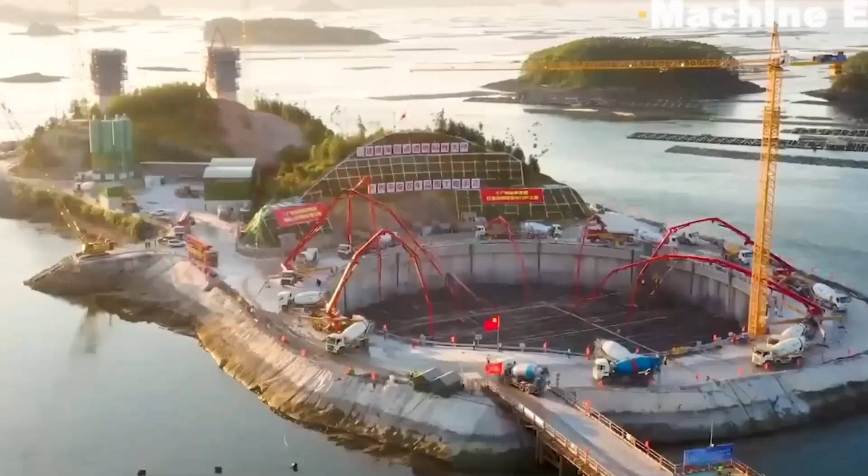A bridge in China could send your heart racing because it's the world's highest, and it opened today. It stands more than 1,800 feet above the valley below. Well, it's almost too good to be true. But it's true that China holds records for the world's longest, most massive, and greatest bridges of all time.

This powerful nation is not just building bridges, it is moving people, goods, and culture to different areas. As a global leader, no wonder engineers in America are left in shock due to the mighty Chinese construction technology. Let's start crossing some of these bridges and learn their monumental building journey.

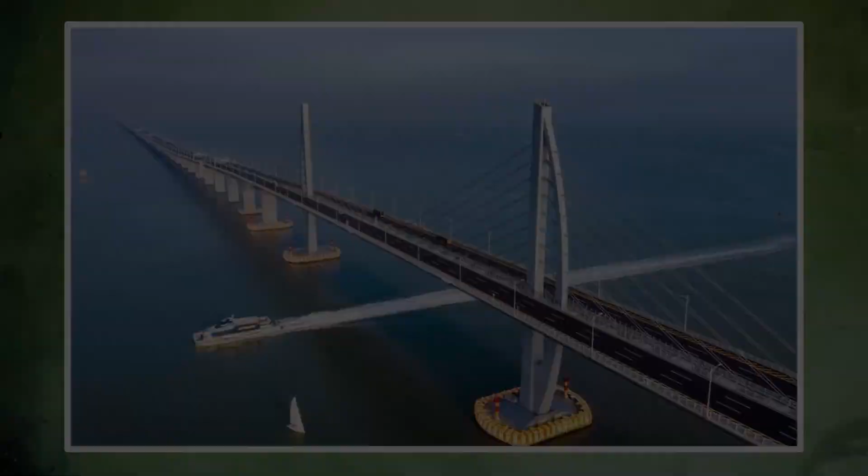We'll begin with the best bridge out there, truly stretched out and massive. The Danyang-Kunshan Grand Bridge, a colossal feat of engineering, is widely recognized as one of the most remarkable structures ever built. Spanning 164.8 kilometers, this bridge holds the title of the longest bridge in the world. Completed in 2010 and opened in 2011, it is a central component of the Beijing-Shanghai high-speed railway, one of the most important transportation networks in China.

The bridge's design, scale, and impact on both society and the environment make it a true testament to human ingenuity and modern engineering. The sheer size of the Danyang-Kunshan Grand Bridge is its most obvious and awe-inspiring feature. Stretching over vast expanses of water, wetlands, and mountainous terrain, the bridge is an unparalleled structure in terms of length. It surpasses any other bridge globally, earning its place in the record books.

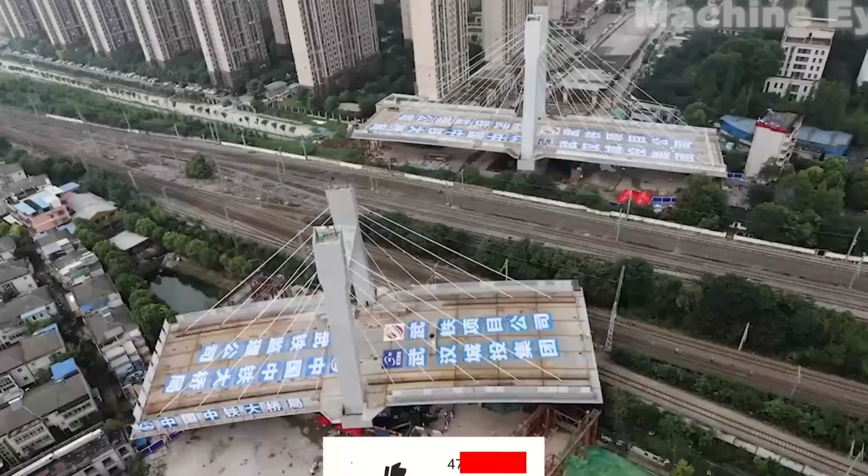The construction of the bridge required meticulous planning, precision, and coordination, with thousands of workers and engineers working tirelessly for several years to complete it. The scale of the project posed significant challenges, but its completion stands as a testament to the capabilities of modern civil engineering. What makes the Danyang-Kunshan Grand Bridge particularly impressive is not just its size, but also the advanced engineering and design that went into its construction.

Built to withstand extreme weather conditions, including earthquakes, floods, and strong winds, the bridge incorporates cutting-edge technology and innovative techniques. Its foundation was specially designed to adapt to the varying conditions of the terrain it crosses. The bridge spans large bodies of water, areas of soft ground, and even mountainous regions, making its design and construction especially challenging. The use of prefabricated sections, advanced cranes, and high-tech materials helped make the project possible, ensuring both durability and efficiency.

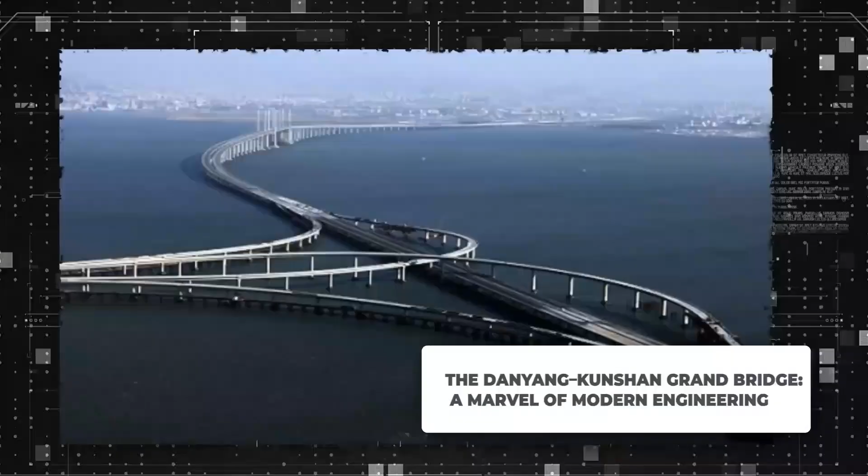The bridge is composed of several segments, each carefully constructed to meet the specific challenges of the environment. It is supported by a combination of viaducts, embankments, and elevated sections that allow it to traverse such a wide and varied landscape. The structure's design incorporates features that ensure the safety and longevity of the bridge, including anti-corrosion materials and reinforced supports that can endure the test of time.

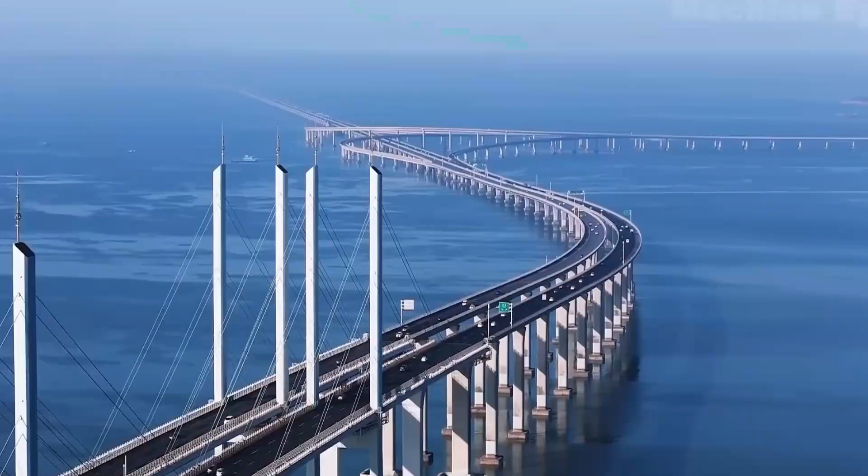Beyond its impressive engineering feats, the Danyang-Kunshan Grand Bridge plays a crucial role in China's high-speed rail network, which connects the bustling cities of Beijing and Shanghai. This bridge is part of the larger Beijing-Shanghai high-speed railway, which significantly reduces the travel time between these two major cities. The journey that once took over 12 hours by car or train is now reduced to about 4 hours, revolutionizing transportation in China and connecting millions of people to opportunities and resources across the country.

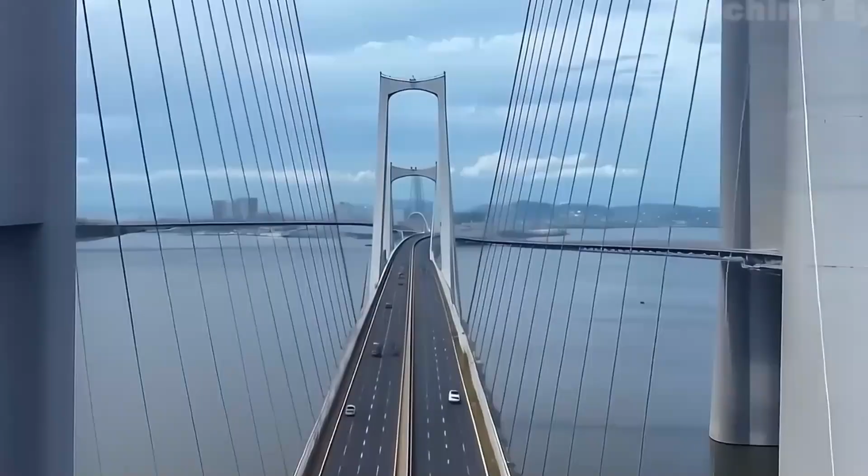This bridge, along with the broader railway system, has been a key factor in China's economic growth. By improving transportation efficiency, it has enabled faster movement of goods, tourists, and workers between cities, promoting economic integration and regional development. The Danyang-Kunshan Grand Bridge has thus become a critical artery in China's transportation network, facilitating trade, tourism, and communication between key urban centers.

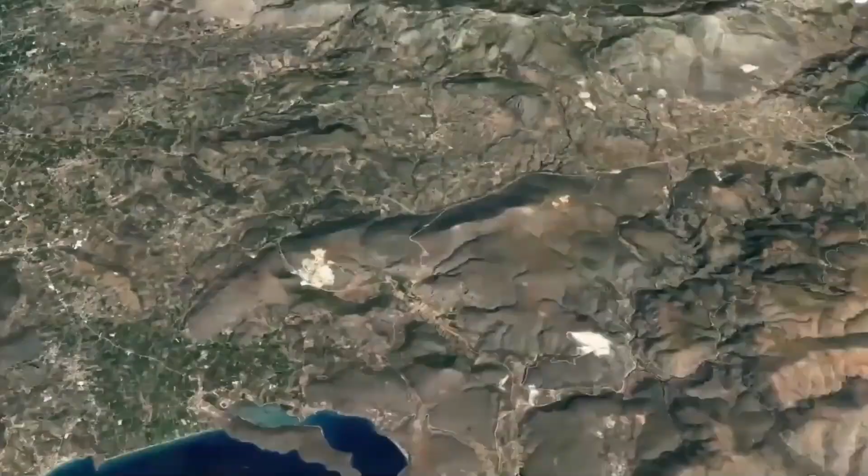The Danyang-Kunshan Grand Bridge was built with an awareness of its environmental impact. Construction techniques were chosen to minimize disruption to local ecosystems, and careful planning was undertaken to preserve the surrounding environment. Despite its massive scale, the bridge's environmental footprint was minimized, and its construction involved the use of eco-friendly materials and methods. In areas where the bridge crossed wetlands and rivers, engineers took special care to ensure that the bridge's foundations did not damage the natural habitats.

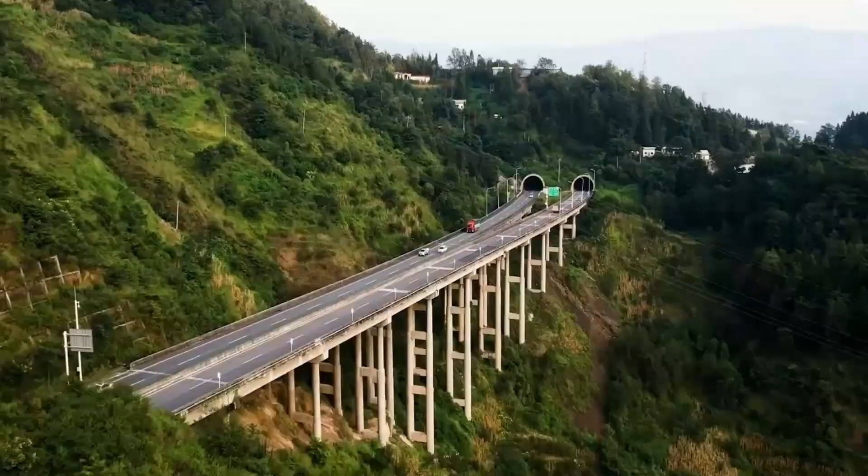Socially, the bridge has had a positive impact on local communities. It has brought new opportunities for trade, tourism, and business to regions that were previously less connected. The high-speed rail system has also made it easier for people to travel for work or leisure, improving the overall quality of life for millions.

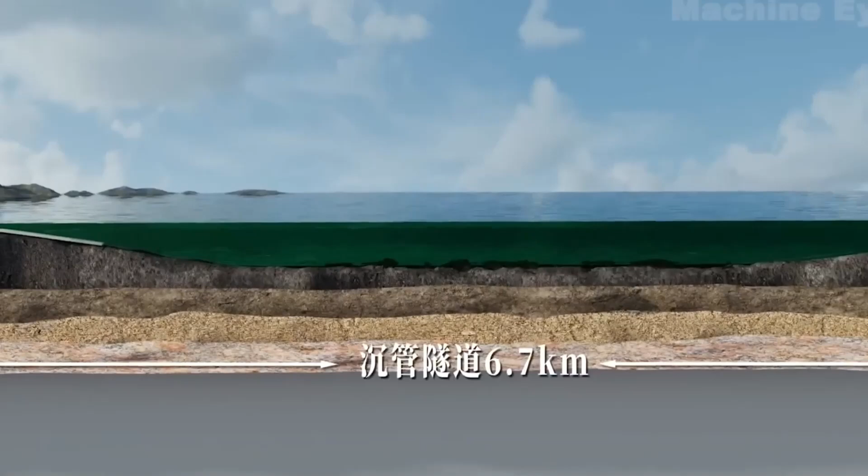The bridge, while a technological marvel, has also played a role in improving the daily lives of those who rely on its transportation system. The Danyang-Kunshan Bridge is a shining example of what can be achieved when engineering, innovation, and determination come together. Its construction not only reflects China's ambitious infrastructure goals, but also highlights the role of technology in overcoming complex challenges. The bridge's ability to cross diverse terrains, its innovative design, and its contribution to improving transportation make it a symbol of the progress that modern engineering has achieved.

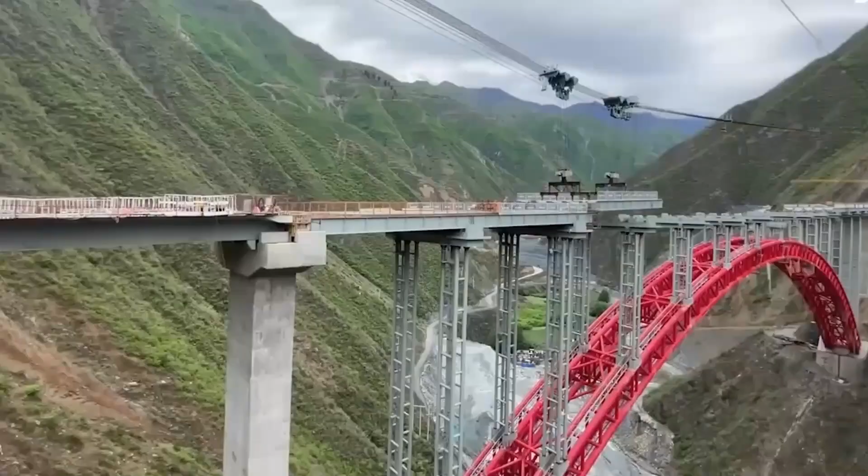The bridge's impact extends beyond its role as a transportation link. It is a symbol of China's ability to create world-class infrastructure and its commitment to enhancing connectivity across the country. It also serves as a reminder of the potential for human ingenuity to shape the future and address the growing demands of an increasingly interconnected world.

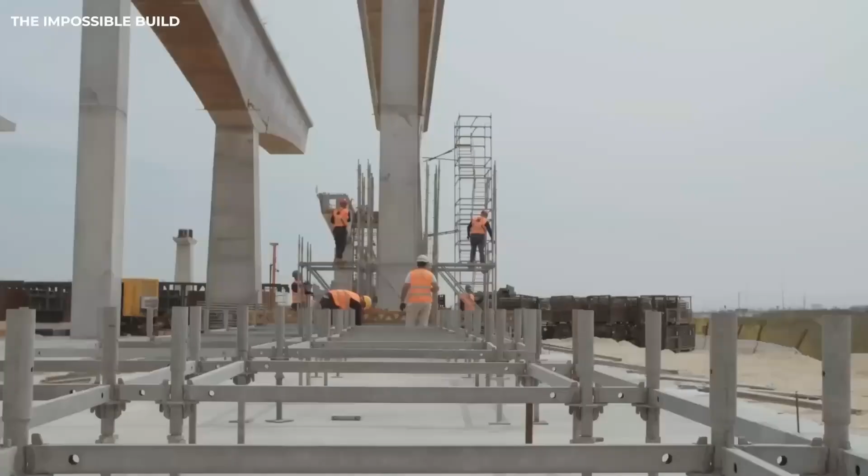As a key part of the Beijing-Shanghai high-speed railway, this unmatched bridge has revolutionized travel and played a significant role in China's economic development. The Danyang-Kunshan Bridge is not just a physical structure. It is a testament to the future of global infrastructure and the incredible feats that engineering can achieve.

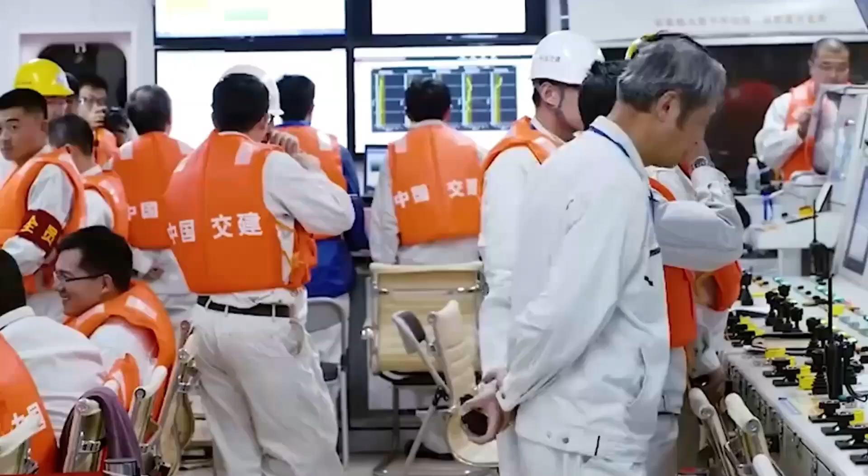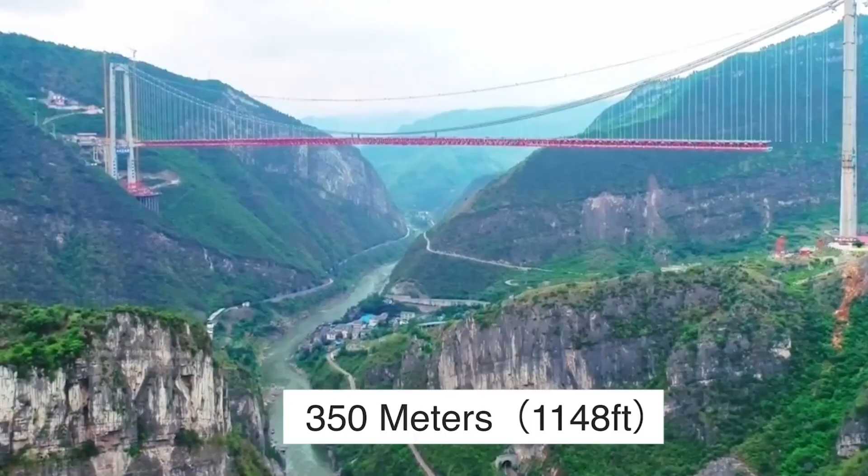The Hong Kong-Zhuhai-Macau Bridge is one of the most ambitious and awe-inspiring infrastructure projects in recent history. Stretching over 55 kilometers, 34 miles, this bridge and tunnel system links three major cities in the Pearl River Delta, Hong Kong, Zhuhai, and Macau, making it the world's longest sea-crossing bridge tunnel system. Opened in 2018, the HZMB has revolutionized transportation in the region, significantly reducing travel time between these cities and creating new opportunities for economic integration, trade, and tourism.

The bridge stands as a symbol of China's engineering prowess, economic development, and its vision for a more connected future. One of the most remarkable aspects of the Hong Kong-Zhuhai-Macau Bridge is its engineering complexity. The project combines a series of bridges, tunnels, and artificial islands to create a seamless connection between the three cities.

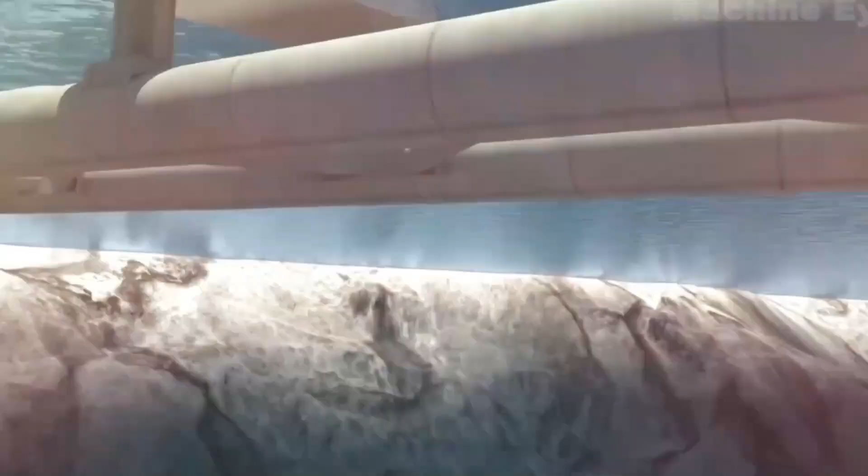The structure includes a 22.9-kilometer bridge, a 6.7-kilometer tunnel under the sea, and a 1.3-kilometer artificial island. The tunnel portion was designed to allow ships to pass through the busy waters of the Pearl River Delta without obstruction, which required innovative engineering solutions to ensure safety and efficiency.

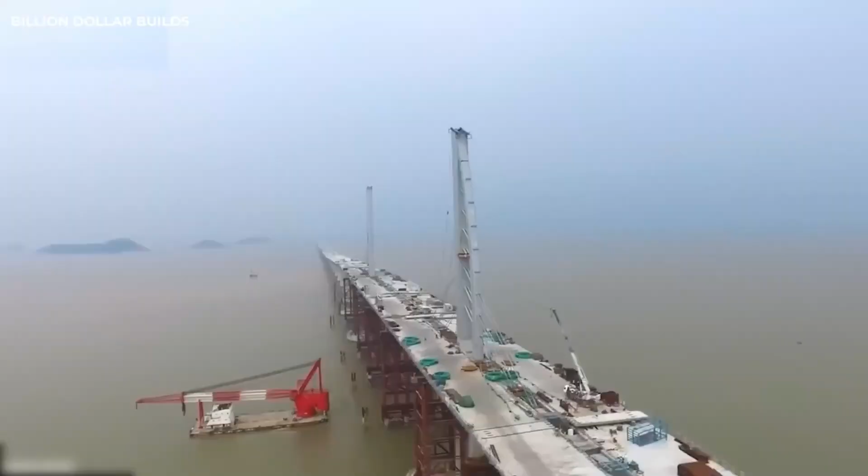The bridge was constructed to withstand the harsh conditions of the region, including strong winds, typhoons, and seismic activity. The use of advanced technology, such as high-strength concrete and steel, as well as state-of-the-art construction techniques, was essential to creating a bridge capable of enduring these environmental challenges. The project also involved overcoming significant logistical and technical hurdles, such as building a tunnel in the sea and creating artificial islands to support the bridge.

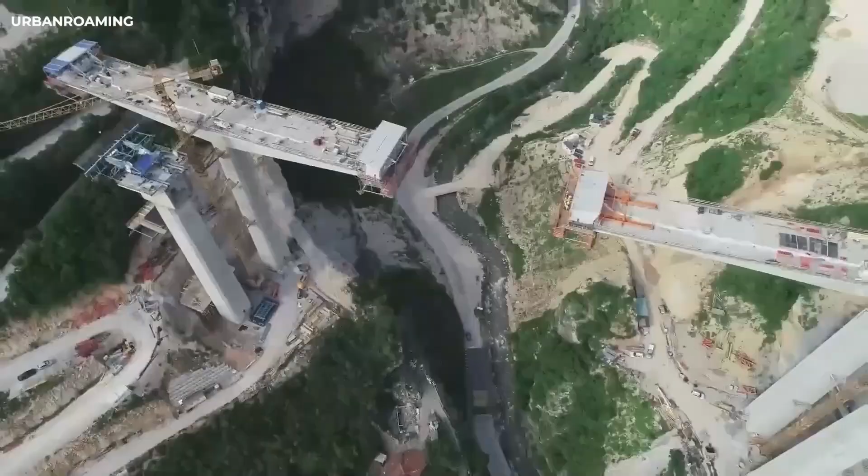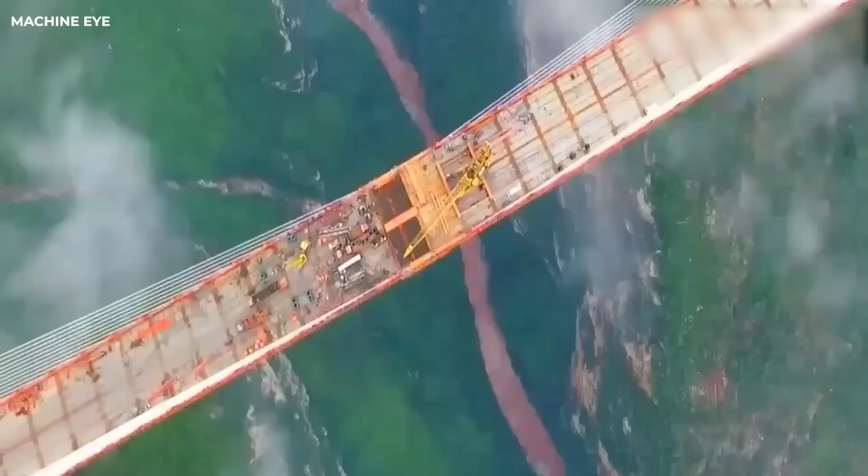Before the Hong Kong-Zhuhai-Macau Bridge, traveling between Hong Kong, Zhuhai, and Macau was time-consuming and inefficient. The journey by road or ferry could take up to 4 hours, depending on traffic and weather conditions. With the opening of the HZMB, travel time between Hong Kong and Zhuhai has been reduced to just 30 minutes, while the journey between Hong Kong and Macau now takes only 45 minutes. This dramatic reduction in travel time has transformed the region's transportation landscape, making it easier for people to travel for work, leisure, and business.

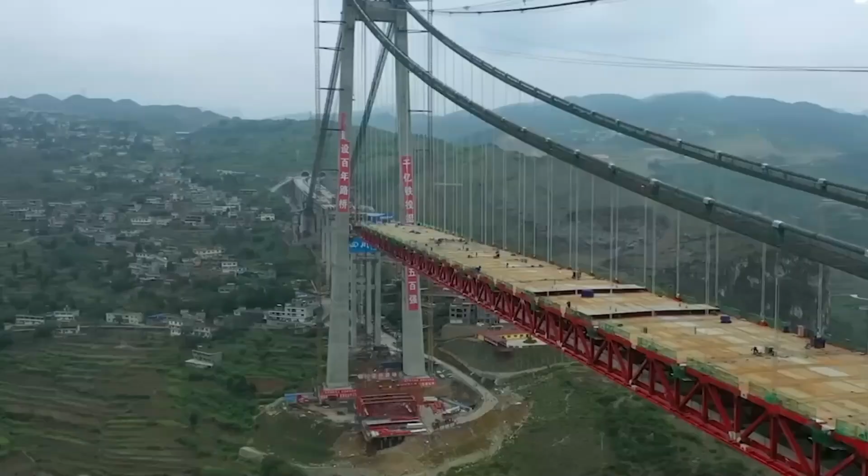The bridge also enhances the economic integration of the Greater Bay Area, GBA, a region that includes Hong Kong, Macau, and 9 cities in Guangdong Province, including Zhuhai. This area is one of China's most dynamic economic regions, and the HZMB plays a crucial role in connecting its cities and facilitating the movement of people, goods, and services. The bridge has opened up new possibilities for cross-border cooperation and trade, allowing businesses to operate more efficiently and individuals to access new opportunities in neighboring cities.

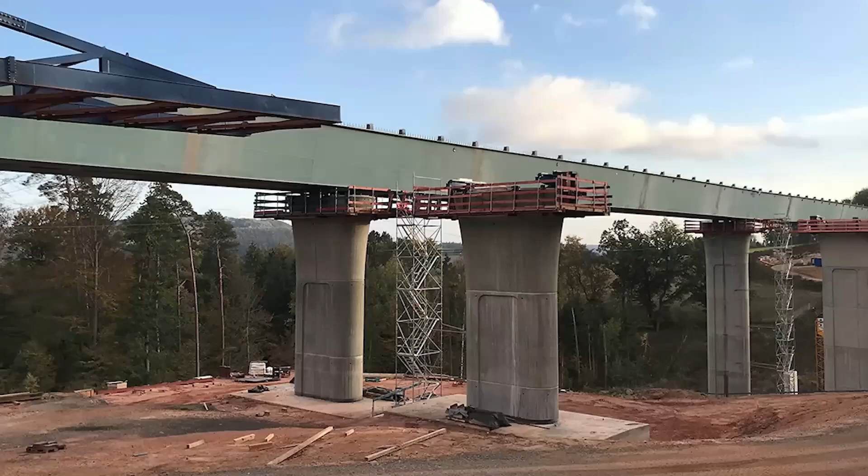The Hong Kong-Zhuhai-Macau Bridge has had a significant impact on tourism in the region. Prior to the bridge's construction, travel between Hong Kong, Macau, and Zhuhai was often cumbersome and limited by ferry schedules or border control procedures. With the bridge in place, tourism has become more accessible and convenient, benefiting both local economies and international visitors. The bridge makes it easier for tourists to visit multiple cities in a single trip, boosting the tourism industry in all 3 regions.

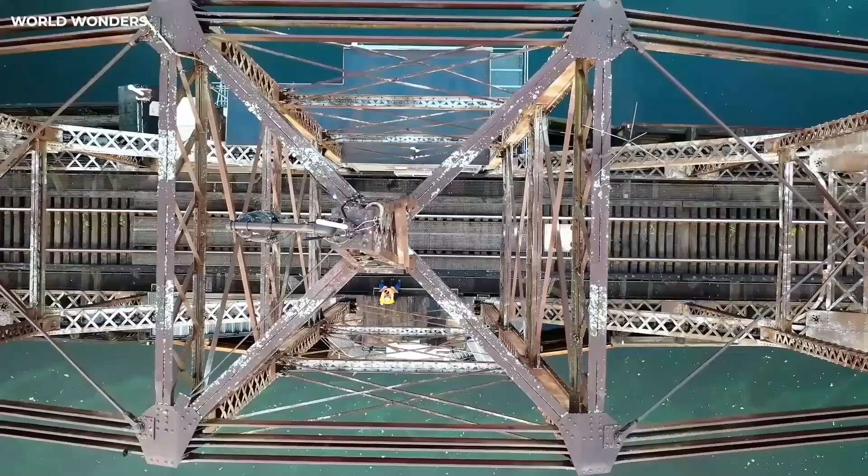Moreover, the improved connectivity has contributed to regional development, particularly in Zhuhai and Macau. As more people are able to travel easily between these cities and Hong Kong, new business opportunities have emerged, leading to economic growth and the creation of jobs.

The HZMB has also helped to stimulate investment in infrastructure and services, further boosting the region's development prospects.

While the Hong Kong-Zhuhai-Macau Bridge is a monumental achievement in terms of engineering and transportation, it has not been without its environmental and social challenges.

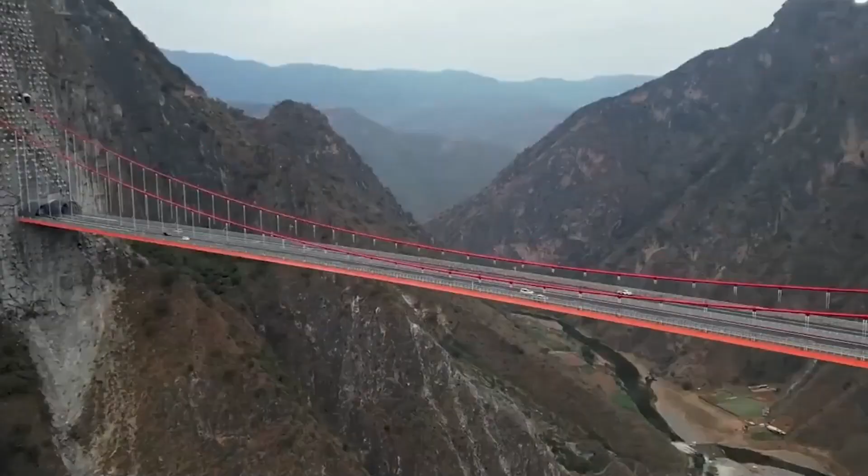The construction of the bridge involved significant changes to the region's landscape, including the creation of artificial islands and the alteration of marine habitats. Environmental impact assessments were conducted to mitigate these effects, and various measures were implemented to reduce the bridge's ecological footprint, such as ensuring the preservation of marine life and minimizing the impact on air and water quality.

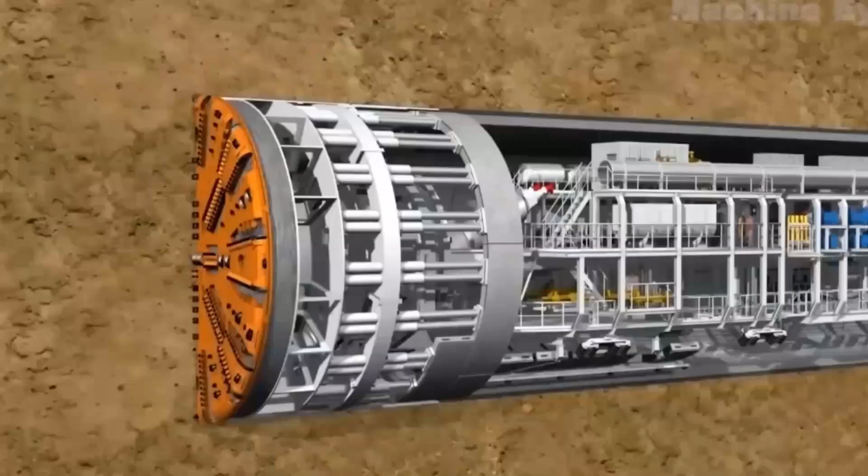Socially, the bridge has faced some criticism due to concerns about its cost, which amounted to approximately $20 billion, and its potential impact on the communities in the area. While the bridge has undoubtedly created new opportunities for economic growth, it has also raised questions about its long-term benefits and the extent to which it will improve the quality of life for local residents.

However, supporters argue that the bridge will eventually have a transformative effect on the region's economy, providing lasting benefits for businesses and individuals alike.

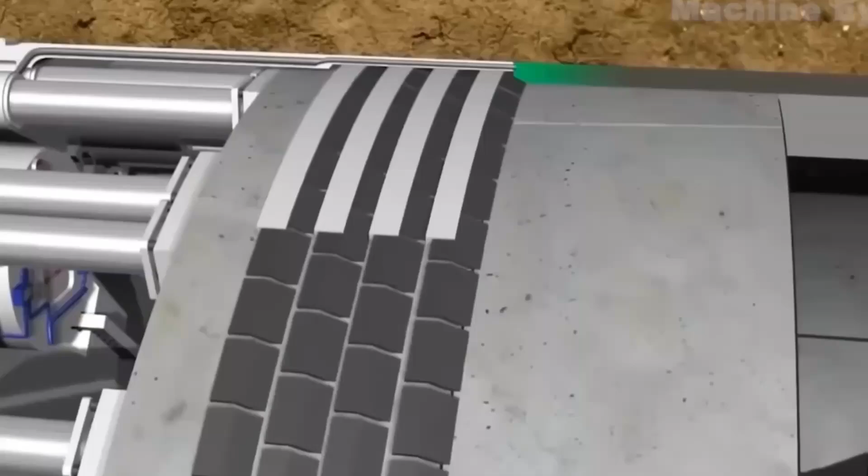The Hong Kong-Zhuhai-Macau Bridge is not only a remarkable engineering achievement, but also a symbol of innovation and collaboration. The project was a joint effort between the governments of Hong Kong, Macau, and China, demonstrating the power of cross-border cooperation in achieving ambitious infrastructure goals.

The bridge has also highlighted China's growing capabilities in large-scale infrastructure projects, further cementing the country's position as a global leader in engineering and construction.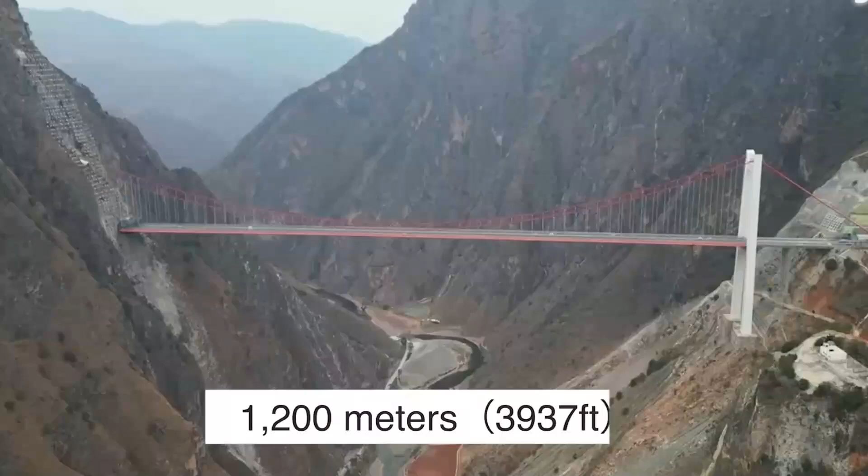The HZMB is more than just a transportation link. It represents the vision of a connected future, where borders are less of a barrier and cities are united by shared opportunities. The bridge is a testament to the ability of modern engineering to overcome challenges and create solutions that improve the lives of millions of people.

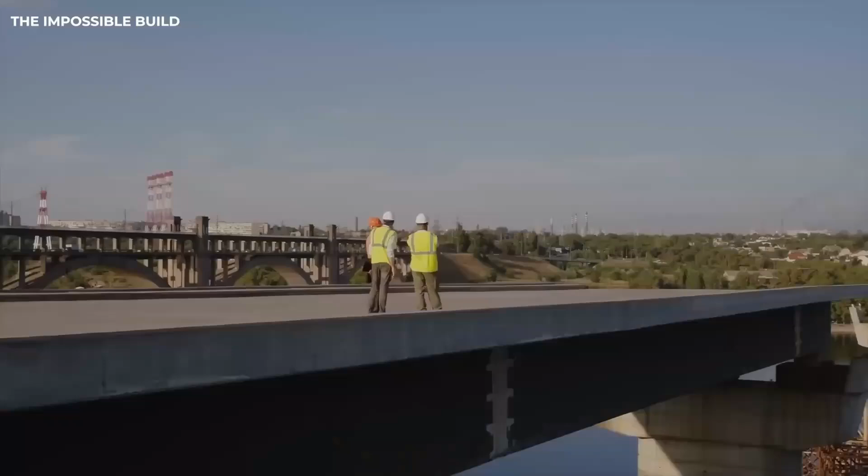While it has faced environmental and social challenges, the bridge's overall impact has been overwhelmingly positive, and it stands as a testament to human ingenuity, collaboration, and the pursuit of progress.

As the bridge continues to play a vital role in the Greater Bay Area's development, it will undoubtedly be remembered as one of the most significant infrastructure projects of the 21st century.

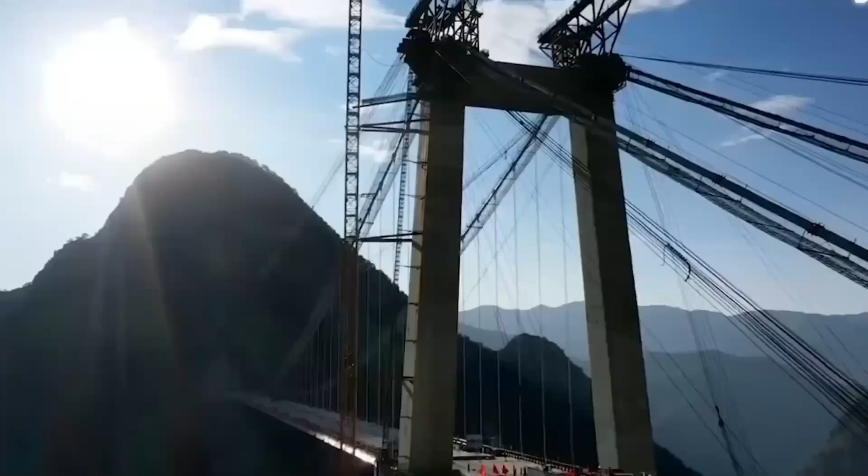The Xihoumen Bridge, located in the Zhejiang province of China, is a monumental feat of engineering and one of the most impressive suspension bridges in the world.

Spanning the Xihoumen Strait, the bridge connects the island of Jintang to the Zhoushan archipelago, facilitating smoother transportation in an area that was once difficult to access due to the geographical challenges of the region.

At its completion in 2009, the Xihoumen Bridge became the second longest suspension bridge in the world by main span, measuring an astonishing 1,650 meters.

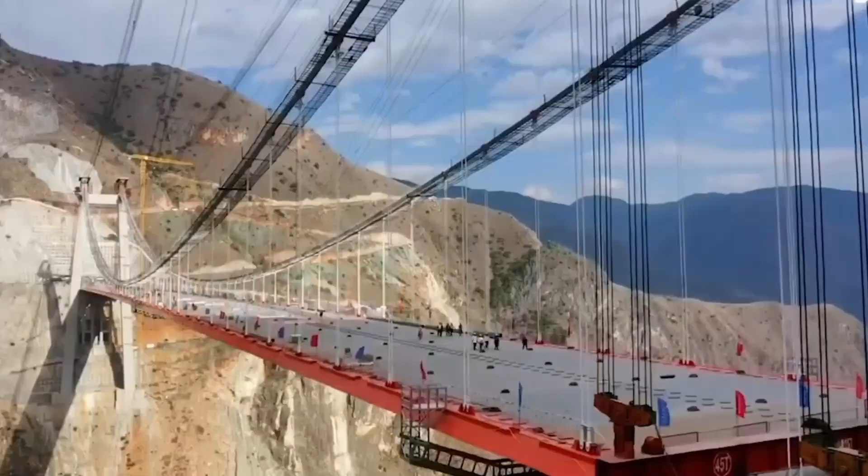The Xihoumen Bridge's construction is a testament to the advancement of bridge engineering. Its design as a suspension bridge, featuring a main span of 1,650 meters, was groundbreaking in terms of its structural complexity and scale. The bridge is supported by two massive towers, each standing at 280 meters tall, which are crucial in bearing the enormous weight of the bridge deck and the heavy traffic it accommodates.

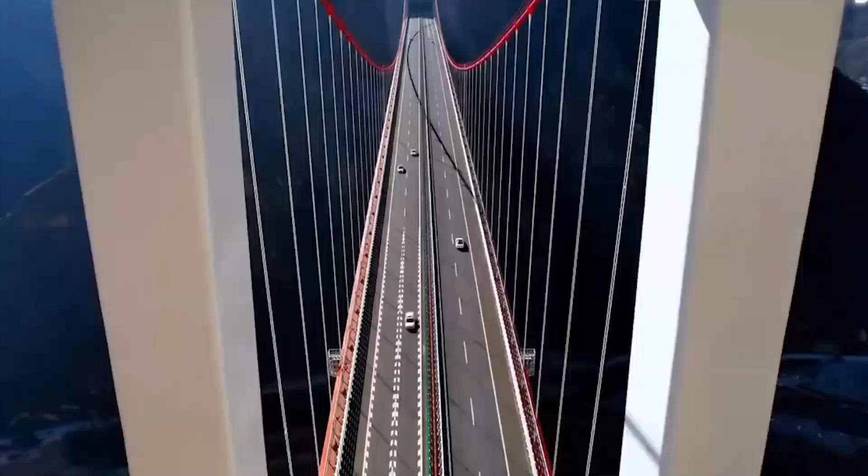The bridge deck is composed of steel and concrete, combining the strength of both materials to ensure durability and stability under the challenging environmental conditions of the region.

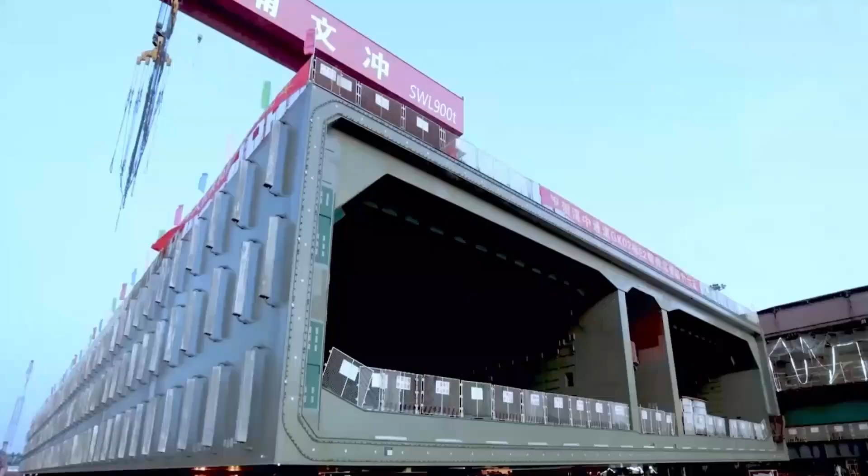One of the primary engineering challenges faced during the construction of the Xihoumen Bridge was its location in a seismically active area and the difficult weather conditions. The strait it spans is often subject to strong winds, frequent typhoons, and seismic activity.

As a result, the design of the bridge needed to incorporate safety features that would allow it to withstand these forces, ensuring the safety of vehicles and pedestrians crossing it. Advanced technologies and construction techniques, such as cable-stayed design and precise anchoring systems, were employed to achieve the necessary structural integrity.

The construction process itself was equally impressive. The bridge was built using a combination of methods, including cantilever construction, where the bridge deck was constructed piece by piece while being supported by the bridge towers. This technique allowed for the precise placement of each section, ensuring a perfect fit and minimal risk of structural failure.

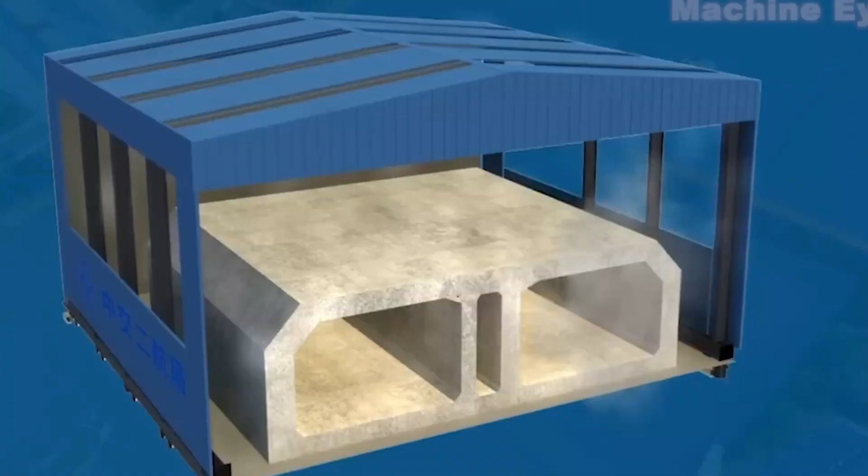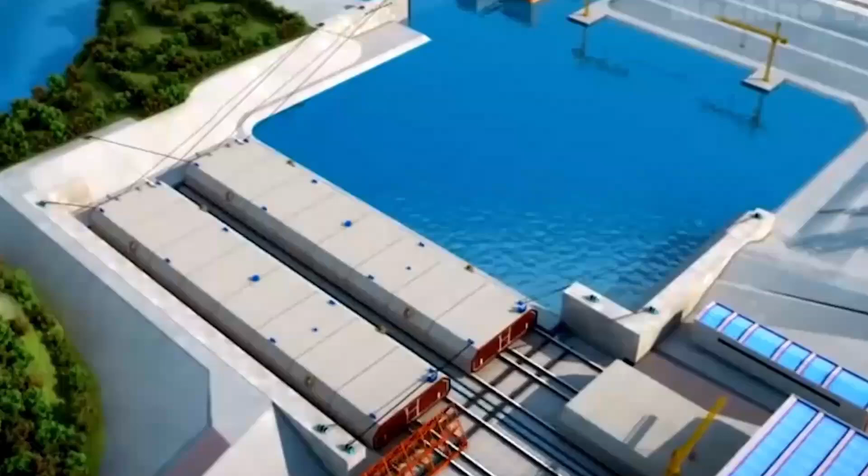This made transportation between the islands and the mainland inconvenient and inefficient, limiting the region's economic development. The completion of the bridge significantly improved the transportation network in the region, making it easier and faster to travel between the islands and the mainland.

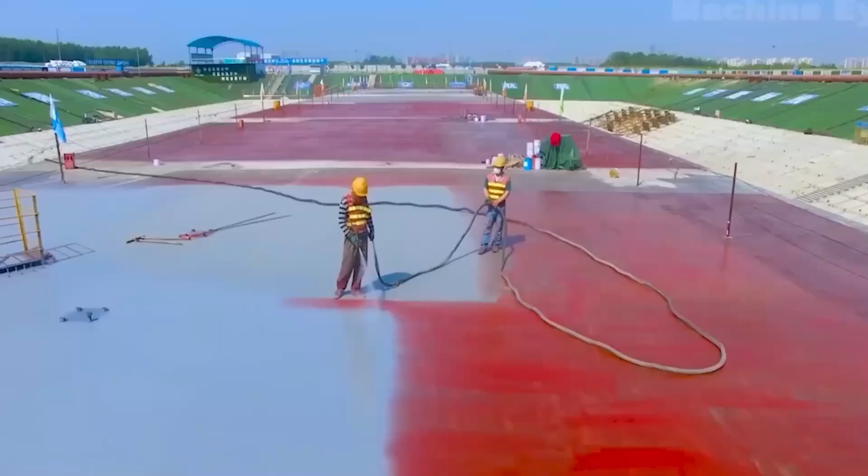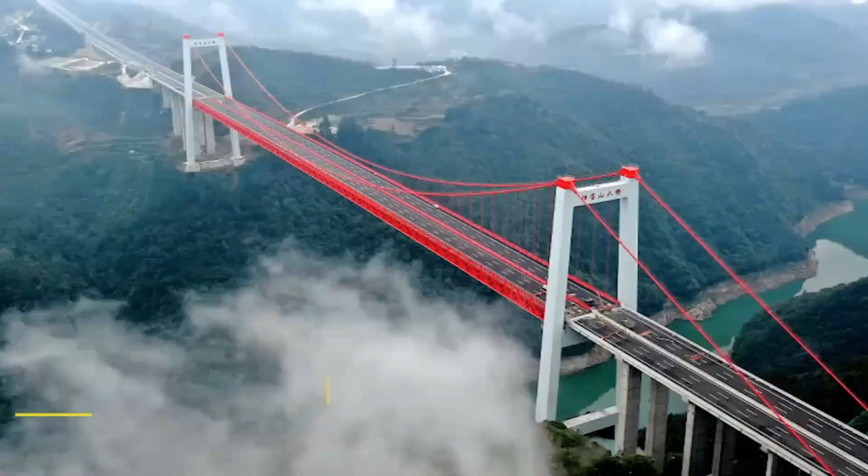Moreover, the bridge has played a key role in facilitating regional integration. As a critical link in the transport infrastructure, it has helped to promote trade and cooperation between the islands and other parts of China, supporting the development of industries such as fishing, shipping, and manufacturing. The improved accessibility has led to the expansion of port facilities and an increase in international trade, further contributing to the economic growth of the region.

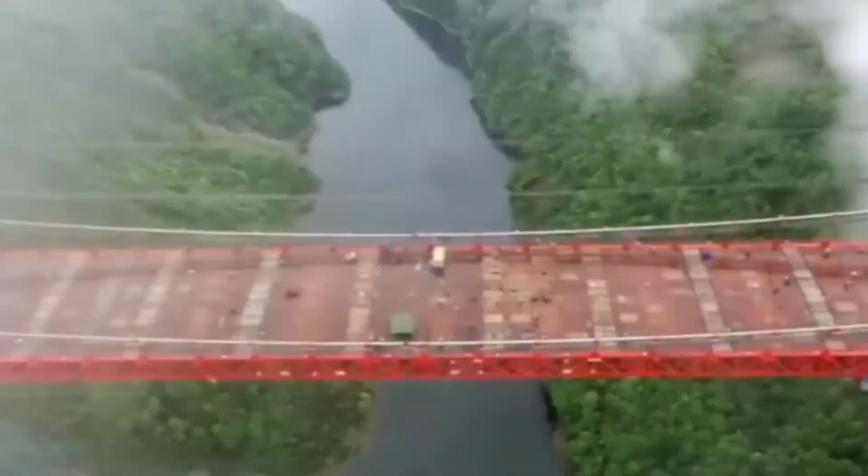As with many large-scale infrastructure projects, the construction of the Xihoumen Bridge raised concerns about its potential environmental impact. The bridge spans a vital marine ecosystem, and environmentalists were concerned about how the construction and the ongoing presence of the bridge would affect local wildlife, particularly marine life. During the planning phase, extensive environmental impact assessments were conducted to identify and mitigate any potential negative effects on the surrounding environment.

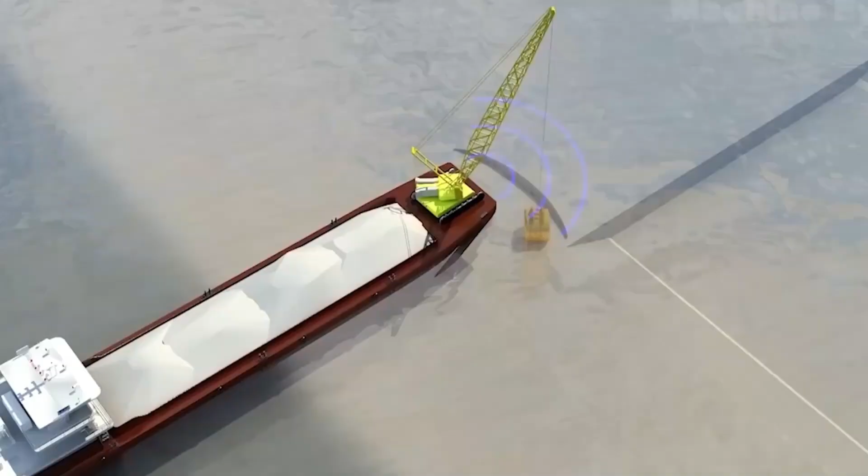To minimize the environmental footprint, measures were taken to protect the local ecosystem. The construction process was carefully planned to avoid disturbing the marine environment, and the bridge's design was optimized to reduce the impact on the surrounding landscape. For example, the bridge was constructed to avoid interfering with key migratory routes for marine species, and the overall footprint of the project was minimized to preserve the natural beauty of the area. Despite these efforts, concerns about the long-term environmental impact of the bridge continue to be monitored.

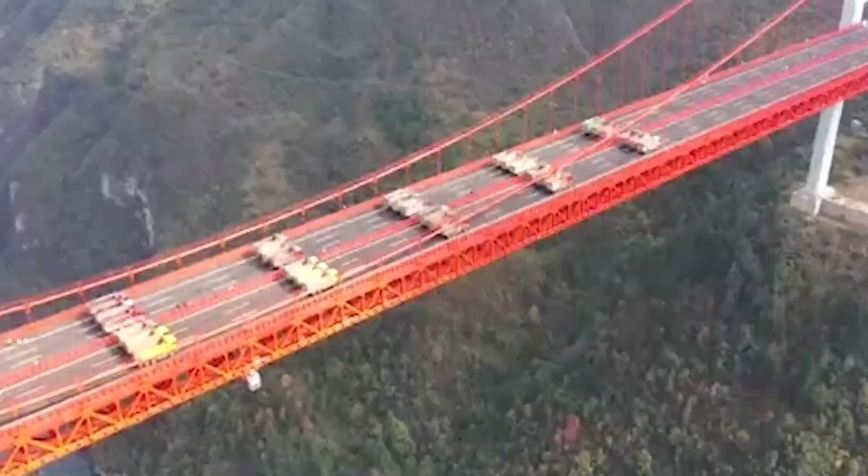The Xihoumen Bridge is not just a physical structure, it has become a symbol of China's rapid modernization and technological prowess. The bridge's impressive scale and design demonstrate the country's ability to undertake and complete complex engineering projects that push the boundaries of what is possible.

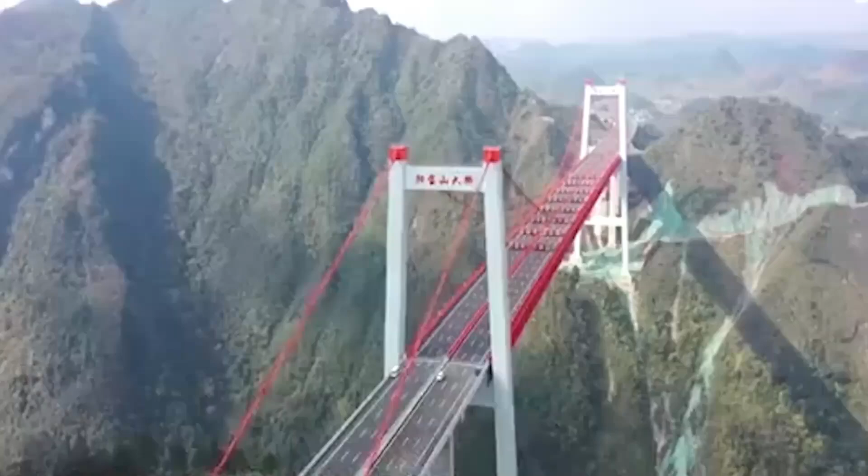The completion of the Xihoumen Bridge is part of China's broader effort to enhance connectivity and regional development. The bridge stands as a symbol of national pride, showcasing the country's engineering capabilities and its commitment to improving the lives of its citizens. It is a reminder of the power of infrastructure to transform communities and create new opportunities for growth and prosperity. The bridge's impressive design, coupled with the challenges overcome during its construction, highlights the skill and innovation of the engineers and workers involved.

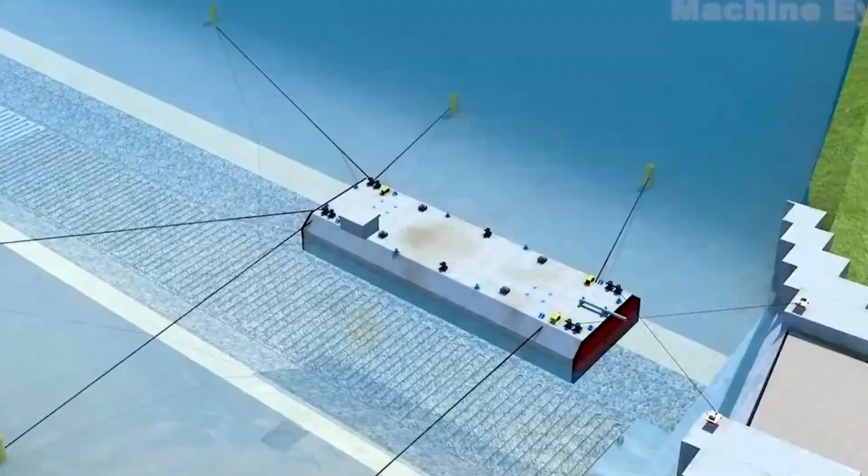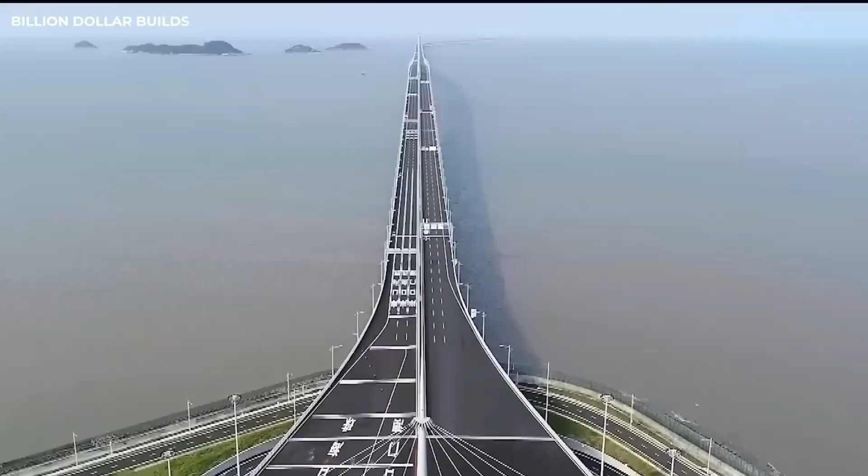The Runyang Bridge, located in Jiangsu Province, China, is a remarkable feat of modern engineering that spans the Yangtze River, one of the longest rivers in the world. Completed in 2005, the bridge complex is composed of multiple sections, including a cable-stayed bridge, a suspension bridge, and several viaducts. As the longest bridge in China and one of the largest in the world, the Runyang Bridge stands as a testament to the advancements in civil engineering and infrastructure development. This essay explores the design, construction, significance, and impact of the Runyang Bridge.

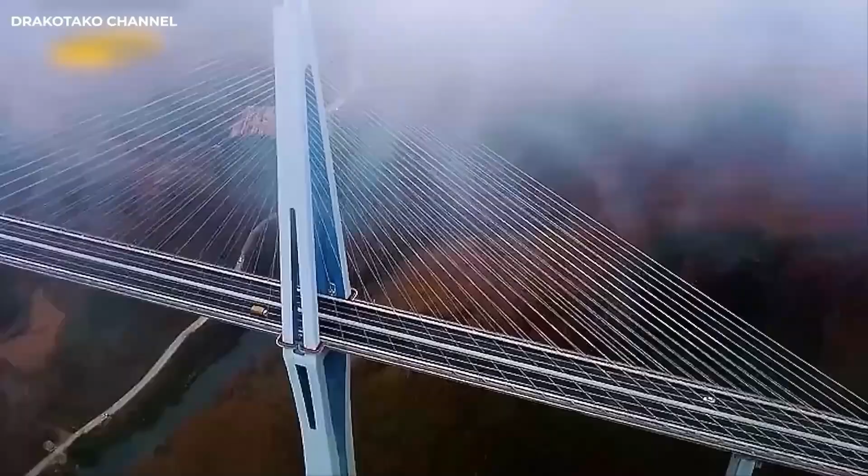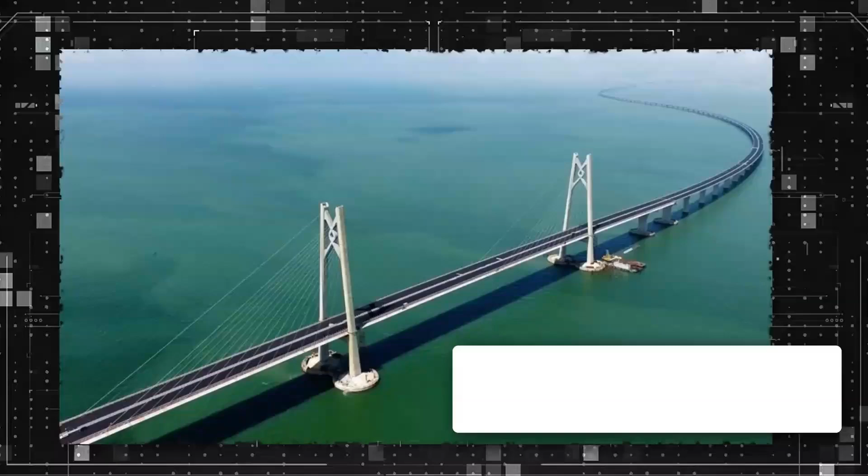The bridge complex stretches over a total distance of 35.6 kilometers, linking the city of Yangzhou on the northern bank of the Yangtze River with the city of Zhenjiang on the southern bank. The design of the Runyang Bridge required careful consideration of the geographical and environmental challenges posed by the Yangtze River. The region is prone to strong winds, seismic activity, and unpredictable weather patterns, all of which present potential risks to the stability and safety of the bridge.

To mitigate these risks, engineers employed advanced technologies and innovative construction techniques to ensure that the bridge could withstand the harsh environmental conditions.

The construction of the Runyang Bridge was an immense undertaking that took several years to complete. The project began in 1999 and was finished in 2005. During this period, the construction team faced a number of challenges, including the need to build the bridge over one of the world's busiest and most unpredictable rivers. The use of floating cranes and other specialized equipment was crucial to the success of the project.

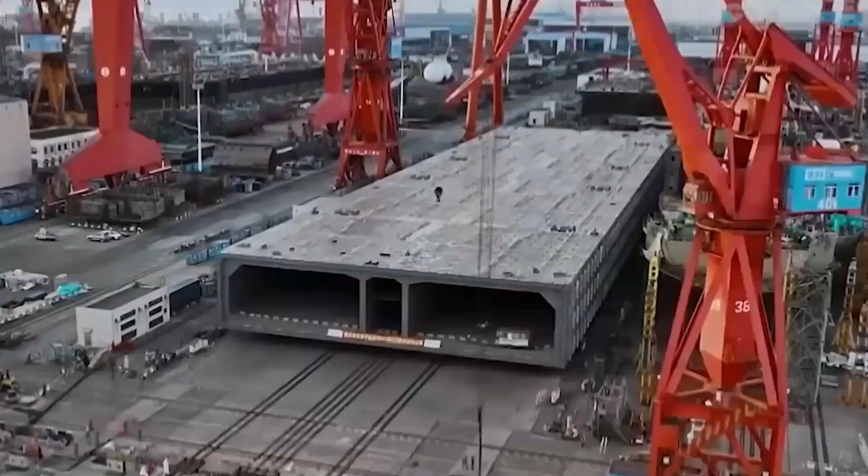The completion of the Runyang Bridge required the efforts of thousands of workers and engineers, whose skill and expertise were essential to bringing this monumental project to fruition.

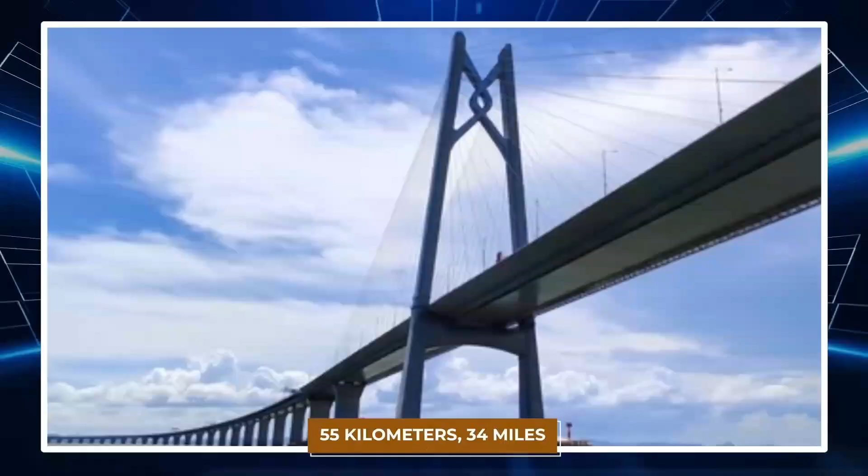The completion of the Runyang Bridge has had a profound impact on the region's economy and social development. Prior to the bridge's construction, the Yangtze River was a significant barrier to transportation between the northern and southern banks. Ferry services were the primary means of crossing the river, but they were slow, unreliable, and often subject to disruption due to adverse weather conditions.

The construction of the Runyang Bridge eliminated these transportation challenges, providing a direct, reliable, and efficient route for vehicles, goods, and passengers to cross the river.

The bridge has significantly reduced travel time between the cities of Yangzhou and Zhenjiang. Before the bridge, the journey across the Yangtze River required travelers to use ferry services or take a long detour, which could take several hours.

With the completion of the Runyang Bridge, travel time between the two cities has been reduced to just a few minutes, fostering greater economic interaction and boosting trade between the two regions.

The improved connectivity has had a ripple effect on the economy, particularly in terms of logistics, tourism, and local business. The Runyang Bridge has opened up new opportunities for industries such as shipping, manufacturing, and agriculture by improving access to markets and resources.

The bridge has also helped promote tourism in the region, making it easier for tourists to visit the cities of Yangzhou and Zhenjiang and explore the cultural and historical attractions of the area.

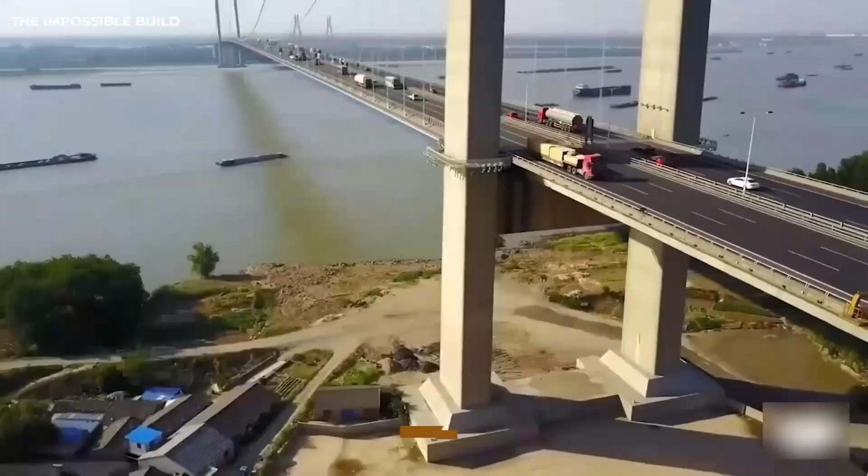The construction of the Runyang Bridge required careful consideration of the environmental impact on the surrounding area. The Yangtze River is home to a diverse range of wildlife, including endangered species, and any construction activity could have had a negative impact on the ecosystem.

As a result, extensive environmental impact assessments were conducted before the construction began to ensure that the bridge's design would minimize disruption to the river's environment.

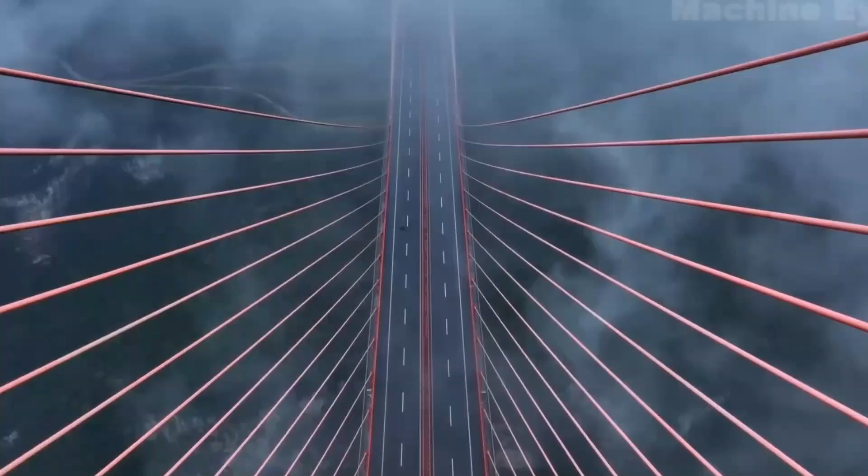To reduce the environmental footprint of the project, the construction team implemented measures to protect local wildlife and the river's ecosystem. For example, the construction of the bridge's piers and foundations was carefully planned to avoid disrupting sensitive areas of the riverbed. Additionally, the bridge's design was optimized to reduce the amount of material required for construction, which helped minimize the environmental impact of the project.

In terms of engineering, the Runyang Bridge features several advanced technologies that enhance its durability and safety. The use of high-strength steel and reinforced concrete in the bridge's construction ensures that it can withstand the weight of heavy traffic and resist the forces of wind, water, and seismic activity.

The bridge's design also includes features such as anti-corrosion coatings and specialized monitoring systems that allow engineers to track the condition of the bridge over time and make necessary repairs or adjustments.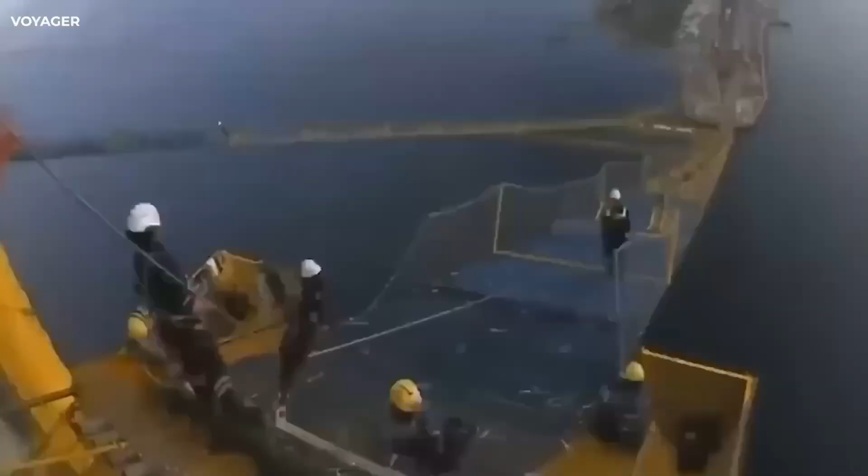In addition to its technical achievements, the Runyang Bridge represents the country's broader economic and social transformation. The bridge has facilitated greater regional integration, allowing for the easier movement of goods, people, and ideas between different parts of China. This has helped foster economic growth, reduce regional disparities, and promote a more interconnected society.

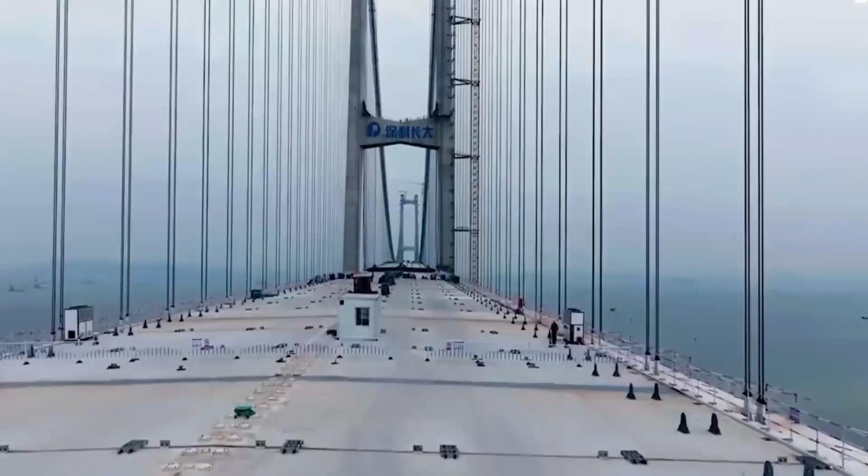The bridge also stands as a symbol of China's growing technological prowess and its ability to execute large-scale infrastructure projects. As a key part of the country's modernization efforts, the Runyang Bridge continues to serve as an important transportation link, driving economic development and connecting communities across the Yangtze River.

The Sutong Bridge, located in the Jiangsu province of China, is one of the most impressive engineering feats in the world. Spanning the Yangtze River, this cable-stayed bridge connects the cities of Suzhou and Nantong, facilitating efficient transportation across one of China's busiest waterways.

Completed in 2008, the Sutong Bridge stands as a testament to the advancements in bridge engineering, design, and construction. It is not only a critical infrastructure project for the region, but also an iconic symbol of China's rapid modernization and its growing technological capabilities in civil engineering.

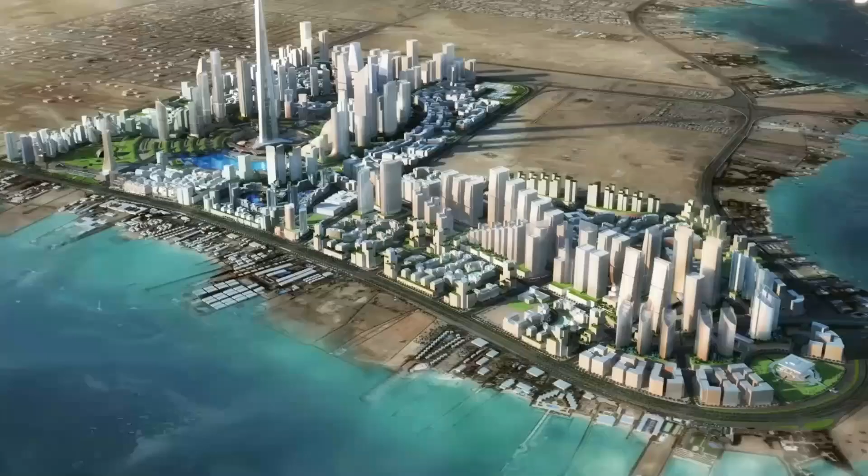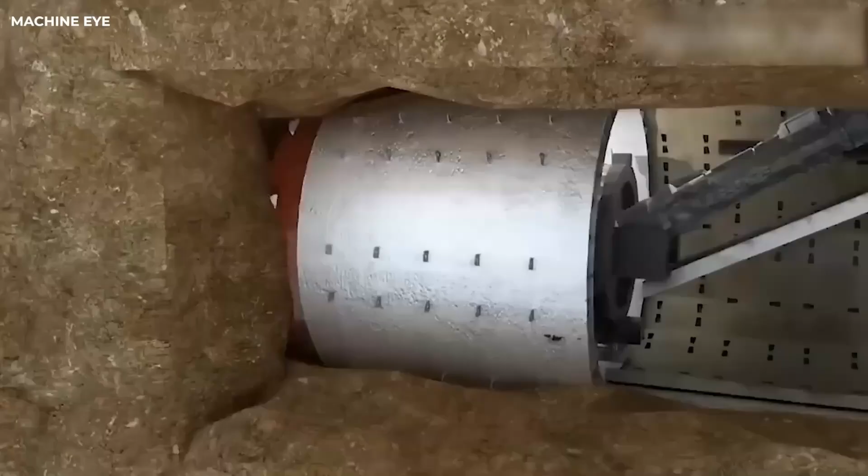The Sutong Bridge features a cable-stayed design, a type of bridge where the roadway is supported by cables connected to towers. With a main span of 1,088 meters, it was, at the time of completion, the longest cable-stayed bridge in the world. The bridge's total length is approximately 8,206 meters (5.1 miles), and it stands 100 meters (328 feet) above the river, allowing for the safe passage of large ships underneath. The central tower, reaching a height of 306 meters (1,004 feet), is a prominent feature, making it one of the tallest structures in the region.

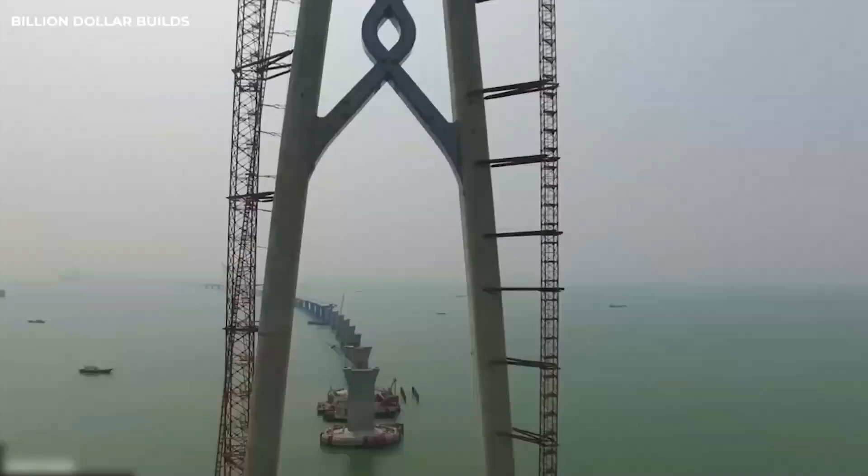To overcome the challenges posed by the wide and fast-flowing Yangtze River, engineers utilized advanced construction techniques and cutting-edge materials. The design took into account the river's strong currents, seismic activity, and environmental factors such as wind. The use of high-strength steel and reinforced concrete ensured that the bridge could withstand heavy traffic loads and extreme weather conditions, while the aerodynamic shape of the bridge reduced the impact of wind forces, ensuring stability and safety.

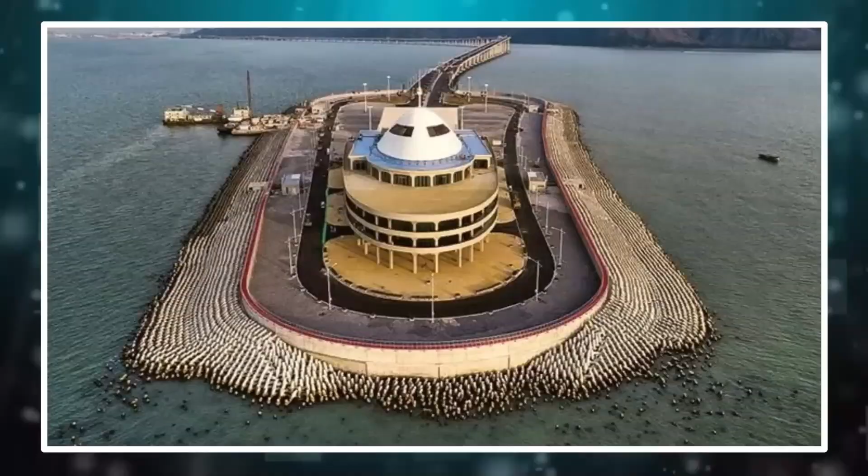The Sutong Bridge has had a profound impact on the economic development of the region. Prior to the construction of the bridge, the Yangtze River was a significant barrier to transportation between Suzhou and Nantong, two rapidly growing cities in the Yangtze River Delta. Ferry services were the primary means of crossing the river, but they were slow and often disrupted by adverse weather conditions. The Sutong Bridge has eliminated these issues, providing a fast and reliable connection between the two cities, significantly reducing travel time and enhancing the efficiency of transportation.

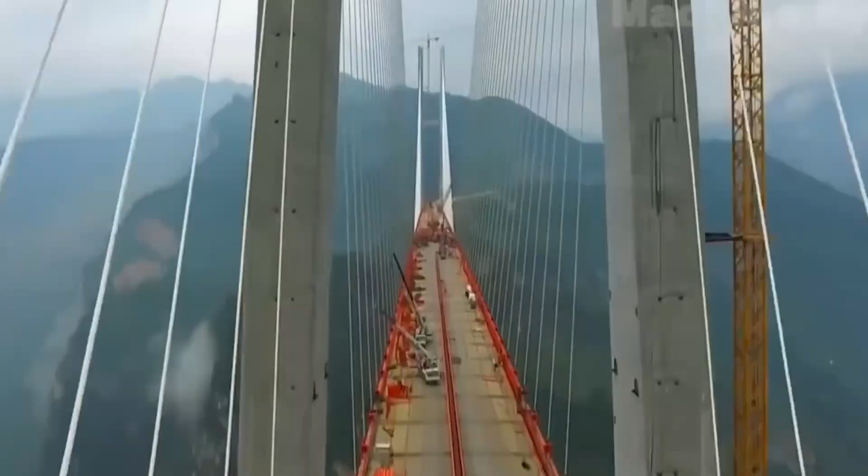The bridge has played a crucial role in boosting trade and commerce between Suzhou and Nantong. With improved connectivity, goods can now be transported more quickly and efficiently across the river, benefiting industries such as manufacturing, logistics, and agriculture. The Sutong Bridge has also contributed to the development of tourism in the region, making it easier for visitors to travel between Suzhou's historical sites and Nantong's cultural attractions. Furthermore, the bridge has fostered greater regional integration, encouraging economic cooperation and collaboration between neighboring cities and provinces.

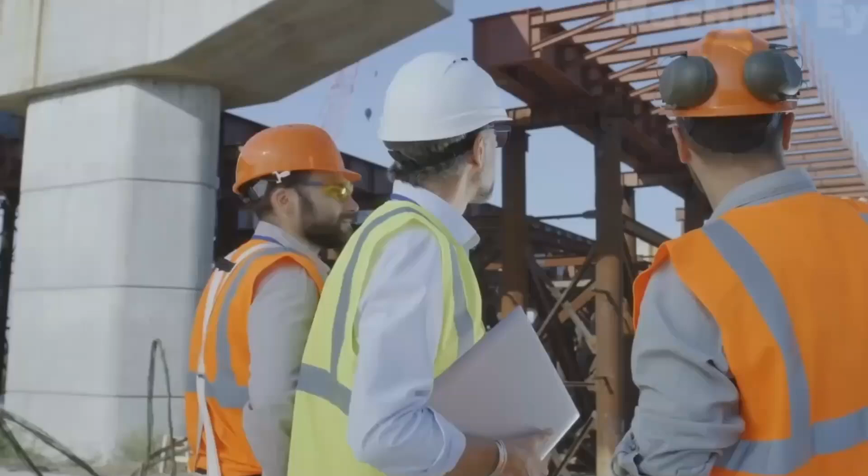The construction of the Sutong Bridge required careful consideration of the environmental impact on the surrounding area. The Yangtze River is home to a diverse ecosystem, and any large-scale infrastructure project has the potential to disrupt local wildlife. Before construction began, extensive environmental impact assessments were conducted to ensure that the project would minimize harm to the river's ecosystem. The bridge's design incorporated features that reduced its environmental footprint, including the use of sustainable materials and construction techniques.

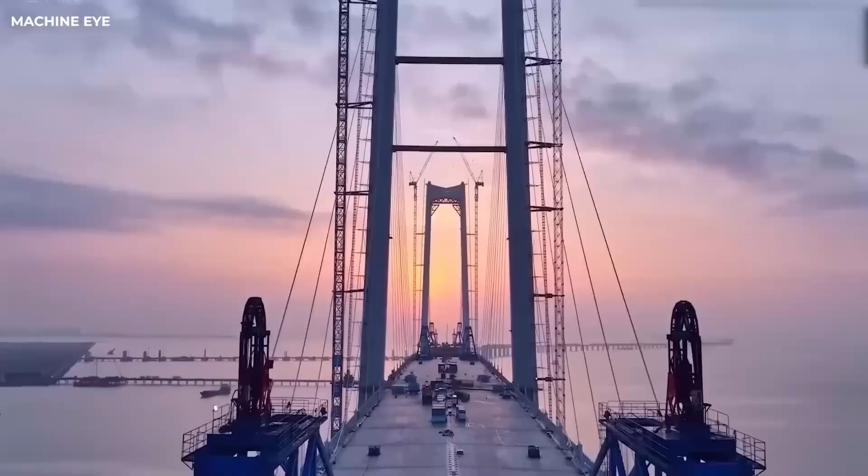In terms of structural considerations, the Sutong Bridge had to be designed to withstand the unique challenges posed by the Yangtze River. The river is known for its strong currents, particularly during the rainy season, which could have affected the stability of the bridge's foundations. To address this, engineers employed advanced techniques for foundation construction, including the use of deep water pile foundations that could anchor the bridge to the riverbed securely. The use of high-quality materials also ensured that the bridge would be durable and resistant to corrosion, especially given the region's humid climate.

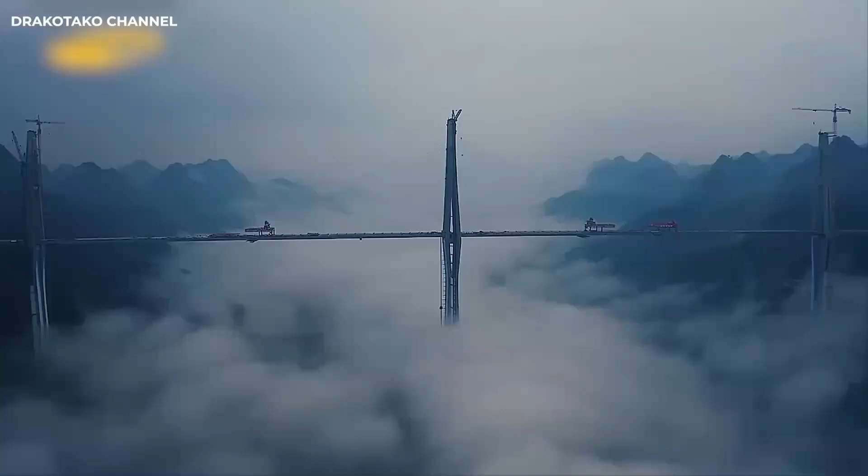The Sutong Bridge is not only an important transportation link, but also a symbol of China's growing technological prowess and its ability to execute large-scale infrastructure projects. The construction of the bridge required a combination of innovative design, advanced materials, and cutting-edge construction techniques. The bridge's impressive size and structural complexity showcase the country's capabilities in modern civil engineering. As China continues to develop its infrastructure, the Sutong Bridge stands as a shining example of the country's commitment to improving transportation networks and enhancing regional connectivity.

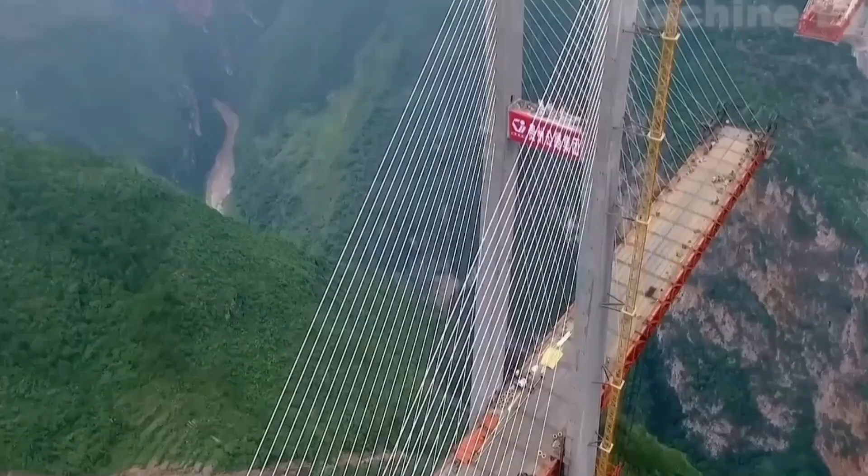The bridge's completion was a significant milestone in China's broader efforts to modernize its infrastructure and support its rapidly growing economy. It has also served as an inspiration for future bridge projects, both in China and around the world, demonstrating the potential of cable-stayed bridge design and the use of advanced construction methods. The bridge is a symbol of China's growing technological capabilities and its ability to undertake large-scale infrastructure projects. As a critical piece of the country's transportation network, the Sutong Bridge continues to play a vital role in promoting economic development and regional integration.